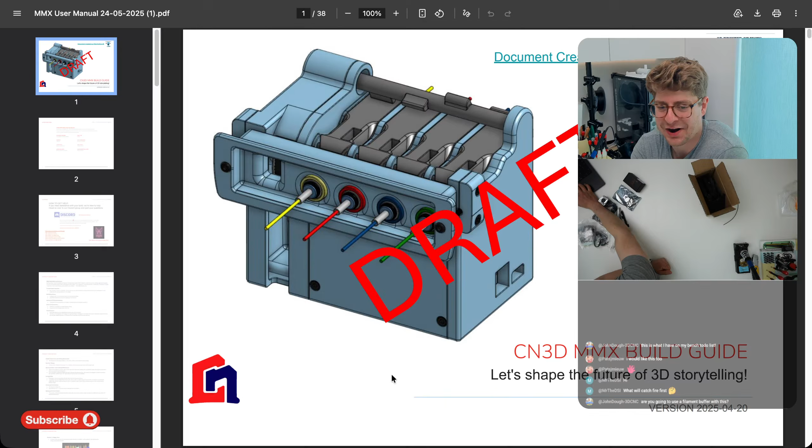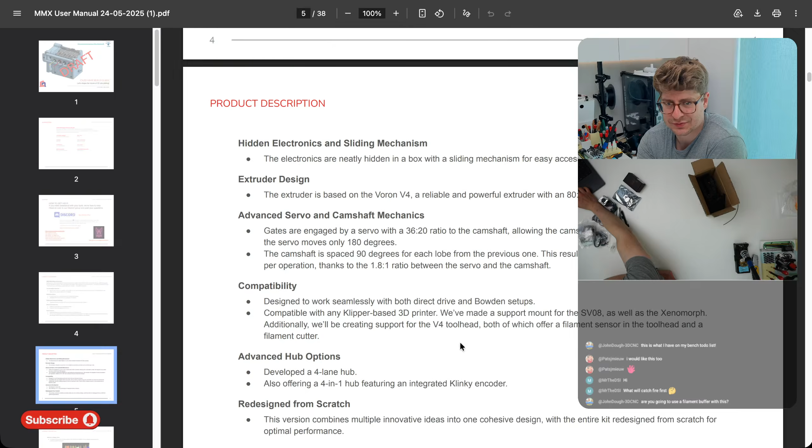Okay, cool. We do have a manual, which has the lovely draft written all over it, and I already noticed it's outdated. It doesn't match the parts I have in a couple of spots. I think there was some revision at some point and this manual was never updated, which is fine. I just want to use it as a rough guide. It's also not really a step-by-step manual, not like your Voron style manual. It's a little bit more high level. So the first part just goes over all sorts of description, which we don't need for now.

The BOM is not correct. Or the BOM is correct, but it doesn't match the steps below. These are all the print parts.

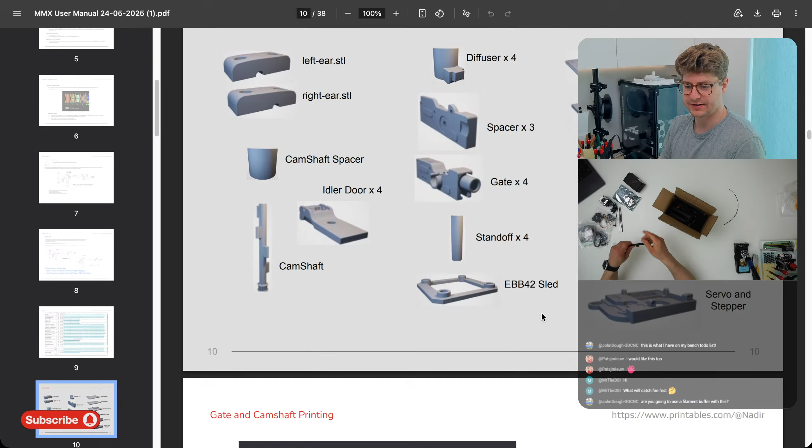So I printed everything, in ABS and PLA. On printables, it said the camshaft and the idler doors. So the camshaft is this one here. This is the camshaft, and the idler doors.

Let me just clump this all out. The idler doors are these, and this is actually the same yellow filament I used on the Switchwire. I had like, I don't know, literally this much left. I printed this and had like a meter of filament left, so it was just enough. It was kind of a one-shot kind of situation.

And the filament was horribly old. I'm not quite sure when I built the Switchwire, but I think it was like 3 years ago or something, and that's how old the filament was. So I dried it a lot, but it was still a little bit brittle. It printed fine though, so no complaints there.

I printed those on the Satsuma, the printer we built last. Oh yeah, and then these are the LED diffusers. These are transparent PETG, 4 of those.

So the printed parts - I hope I didn't miss anything, or that there was anything I should have printed that wasn't clearly described to be printed. Printing was relatively straightforward. You do need supports, like for the camshaft for sure.

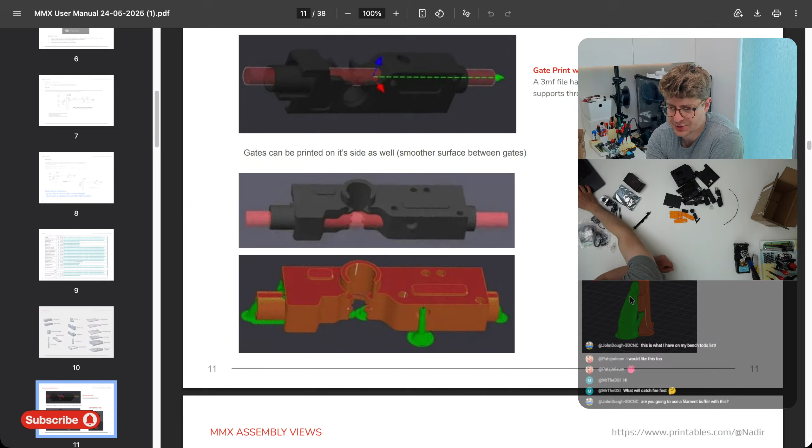I'm not sure if you can see it now, it's behind the chat, but basically the camshaft you print standing up. But also for these, for the gates, you need support. So it's definitely designed with supports needed.

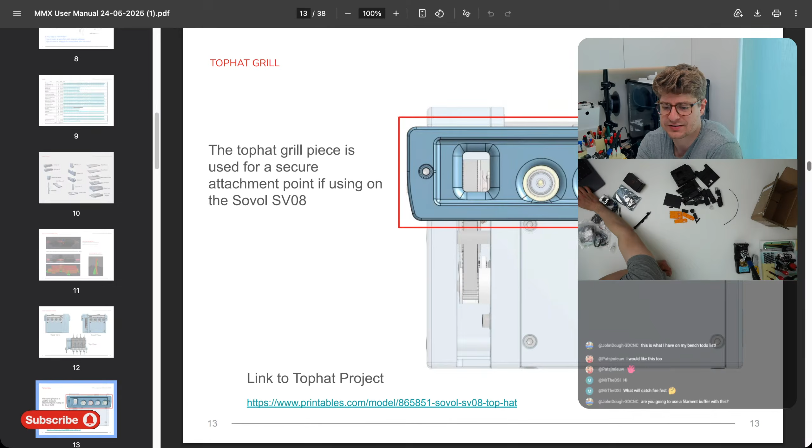And this one, I'm not quite sure, but somehow this is linked to the SV08. I'm not quite sure how, but the official mounting solutions are for the SV08. So we need to come up with something to mount that to the Switchwire later.

That's a little bit the mechanical overview. So basically we have this very big void with the stepper, the servo, the electronics here. And then on the side, we have the mechanics, so to say. The servo is driving the camshaft to select the gate, and the stepper is basically just extruding the filament.

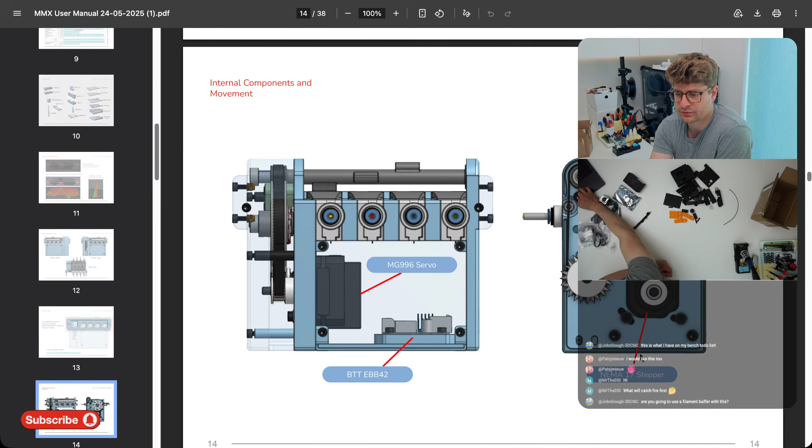That's kind of the side view, so you don't see it again. So you have this big drive gear, which is an 80 tooth gear if I'm not mistaken, which I actually have as a metal gear. So potentially we could also just use the metal gear instead of the printed one. Actually, let's do that maybe - I mean, I literally have the gear, so why not use it?

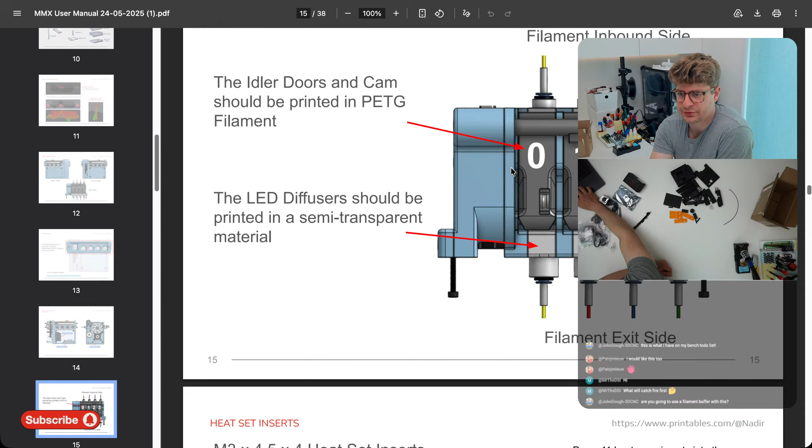Yeah, that's the top view. So we have the gates 0, 1, 2, 3, and I think this is kind of where we need to start off. So these are the heat set inserts, and I think that's a great first step to get started.

And I think these are these two lovely parts here, which are full of heat set inserts. Let me quickly see that I get that right. Oh wait, this is only one part - this is only this part. It's this side and then it's that side.

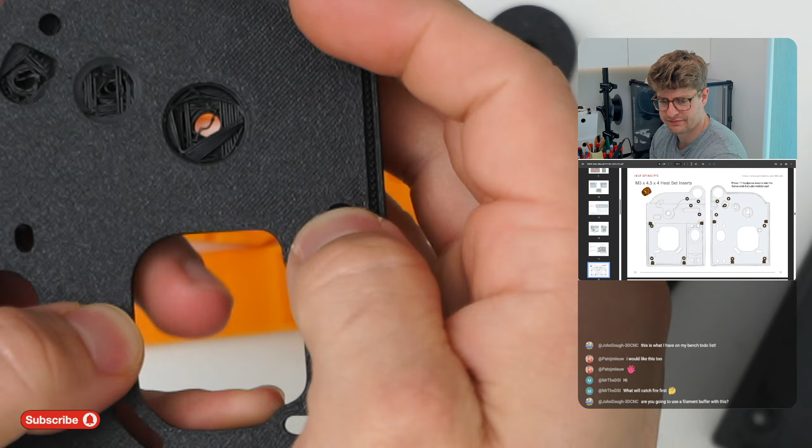Also the holes did not print very cleanly. I mean, it's serviceable, we can clean this up, but the holes - because it was printed basically this way around, the hole overhangs did not print nice. They do use this trick that I also use with the cross bridges, but for some reason this did not turn out so great. But yeah, it will be fine, we will clean this up a little bit.

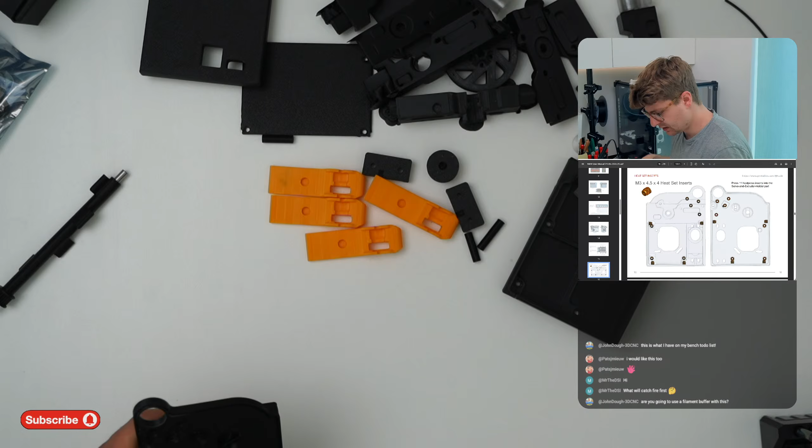But first the insert. So okay, let's start. I see 1, 2, 3, 4, 5, 6, 7. And then on the side we have 1, 2, 3, 4.

Then on the inside, no, that's it. They show the heatset inserts on both views basically. Okay, so it's mostly on this side here.

Let me see. I didn't sort these hardware things because I figured it's not that much hardware this time. So I will just use the bags here, and when we're done, I'll put it in my screw storage.

Okay, and I think the heatset inserts were in this one here. Yeah, I see some more hardware coming out. So we have washers, we have some lovely magnets. We have some M3 nuts, bearings.

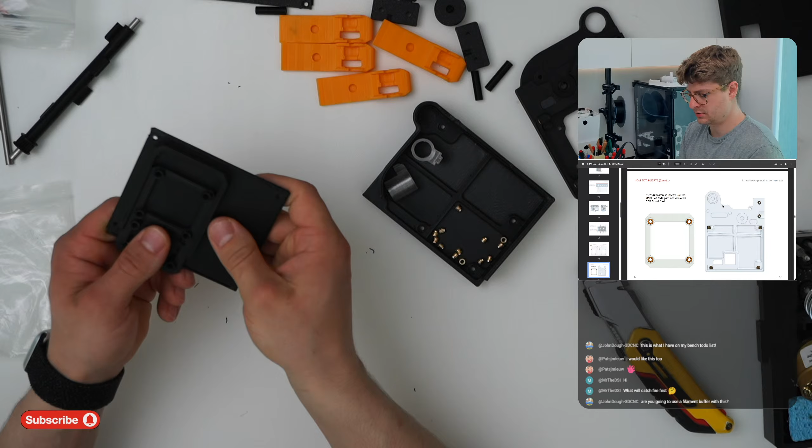So this looks a little bit different from the manual because, as I mentioned, this buck converter was added later, and so the manual is not up to date there.

Okay. And then later sliding in here. And similarly, this screw here.

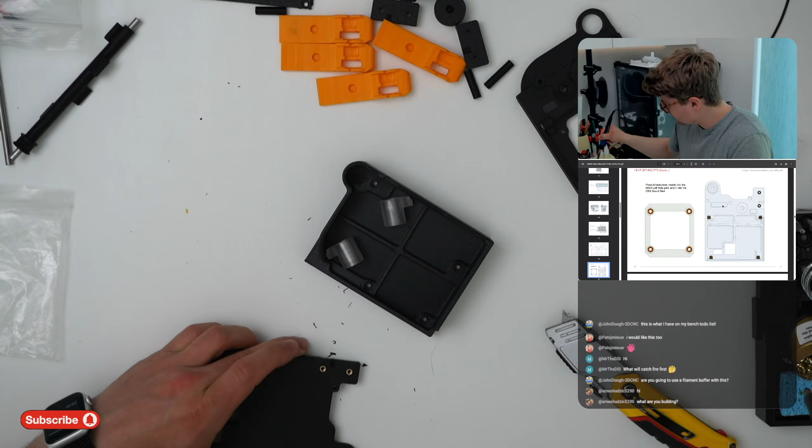No mention. Like this is it. So we do have these 2 short ones here, and there are 2 holes here that do look a lot like they would need a heatset insert. But I will hold out and see if they need to go somewhere else. And then we can later put them in.

Okay. Then they just show us the whole mechanical assembly here. So this is kind of what we have to build. So there are basically 4 pairs of BMG extruder gears in here.

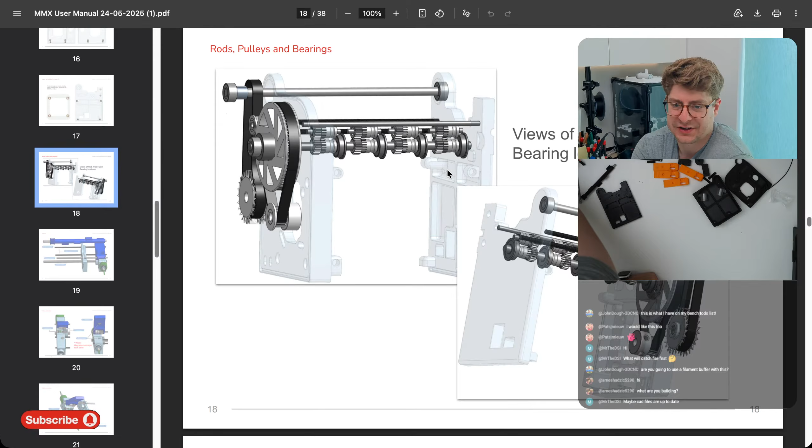Maybe CAD files are up to date. That's actually also a good idea, and I have that, of course, prepared. Oh, it does that again. One second. Sometimes the fusion sharing just freezes. Yeah.

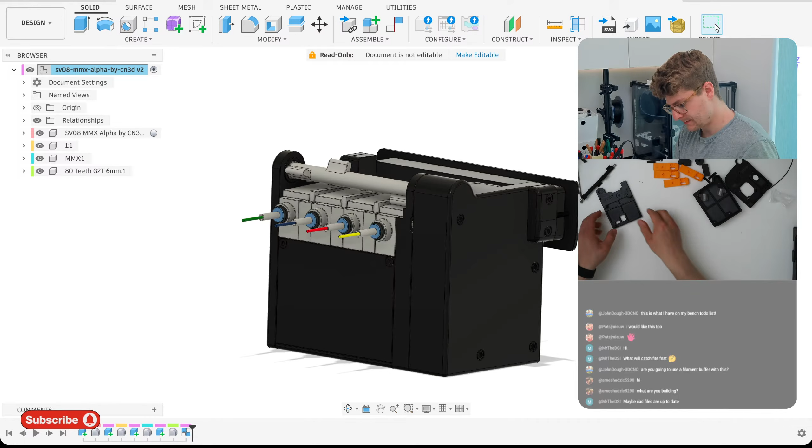No, which part is that? That's the end on the other side. It's this one here. I'm not sure if they model screws here.

I mean, there are definitely 2 heatset inserts in here. Which is body 40. Let me see.

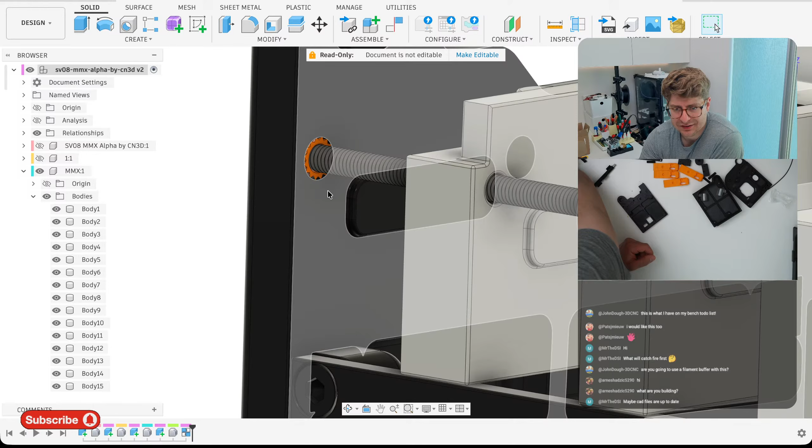Yeah, but it doesn't tell me what this is. And because the body, I cannot isolate it, of course. What did we say? 40 it is.

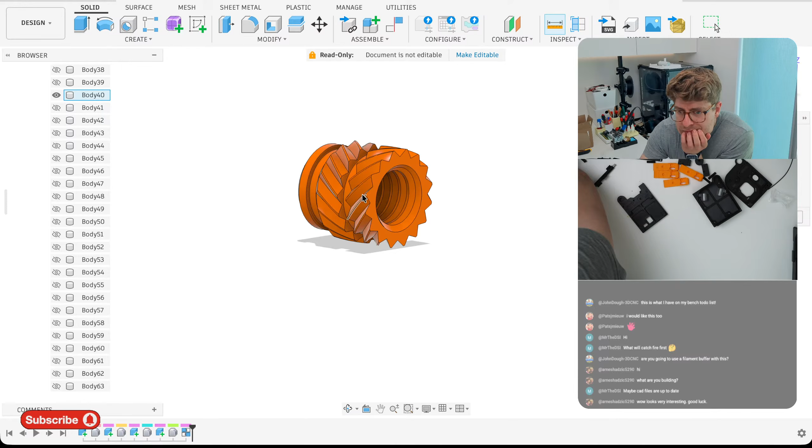0.005 meters. It's very, I think Fusion is a bit drunk. Like, why meters? Can you give this to me? I mean, it's 5 millimeters, but why tell me that in this odd way?

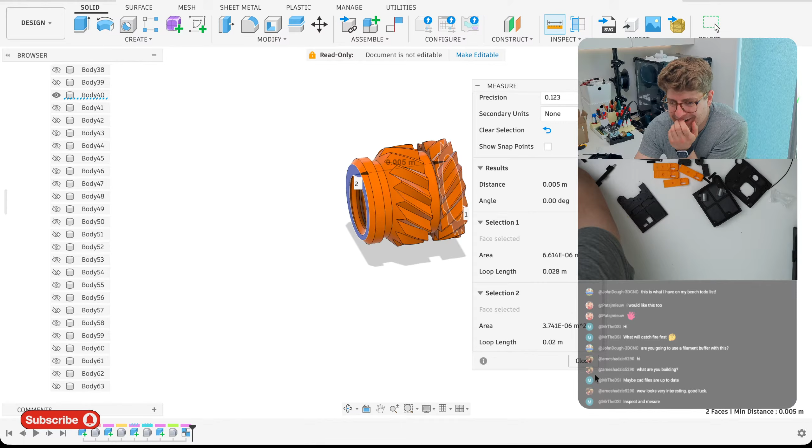That's not helpful. But definitely there needs to be heatset inserts in there. And honestly, the only heatset inserts I have left are these. And I don't think we have, I mean, it can't be anything on the gates because we have 4 gates and 2 heatset inserts.

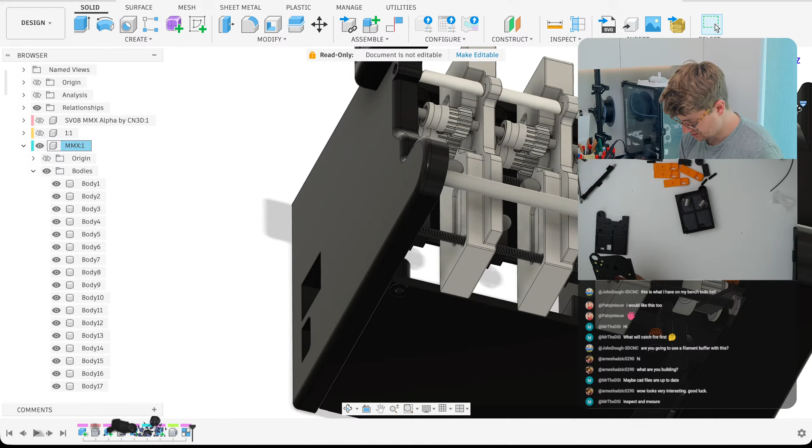So it must be. I don't see any other heatset insert spots. So I think they need to go here. Let's just roll with it.

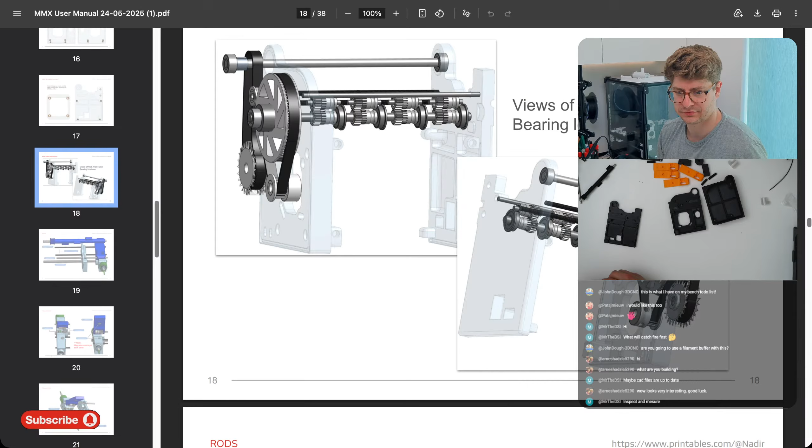Inspect and measure, yeah. But it measures as 5. But I don't see the reason why you would use shorter ones here. But like it's the only spot not mentioned in this document.

Because here it's like they're just empty. They're not like it's in the model. Used. It's weird. Yeah, let's just put them in.

Here you go. Might regret it later. Maybe not.

So when I said the manual is not really step by step, this is what I meant. It's very much just shows you what goes where, but doesn't really give you the order. So heat-set inserts are in. This is the mechanical assembly we want to build.

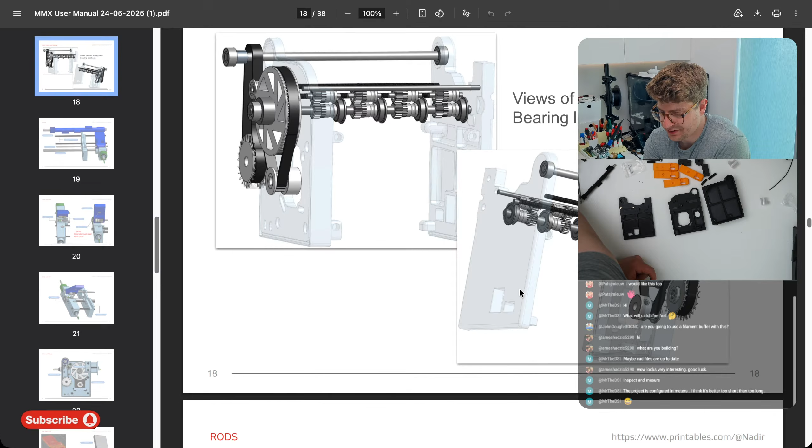The project configuration, I think it's better too short than too long. So this is kind of the mechanical system we want to build, but it's not really clear how to do that step by step.

So I think what we should do is assemble these gates 4 times because we have all the parts now. We can technically put it together. Let's just start with 1 gate and figure it out.

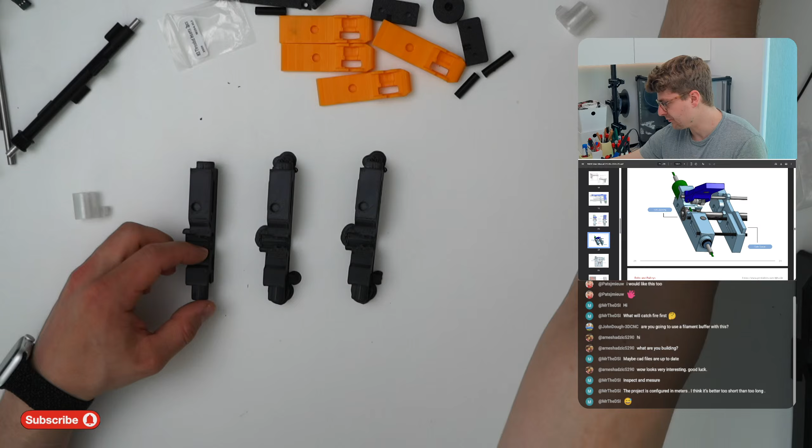So basically how it goes together, we also have to remove some support still here, I didn't do it yet. So we have 4 gates, and in between the gates we have these spacers. They basically go in like this - 3 spacers, 4 gates, and then you kind of smash it together.

And then this kind of is how it fits together. Looking at that now, oh, in the CAD it's the other way, or this image is the other way around. It's like this. Okay, well, either way.

So we have basically 1 bearing here on the side. We have the ECAS on each side - we can add them at the end. And then we have the extruder gears. So let's just put that together.

So we have this M5 shaft that basically goes through all of them. I believe these are the bearings that go in here. They do fit, so let's assume that's the case.

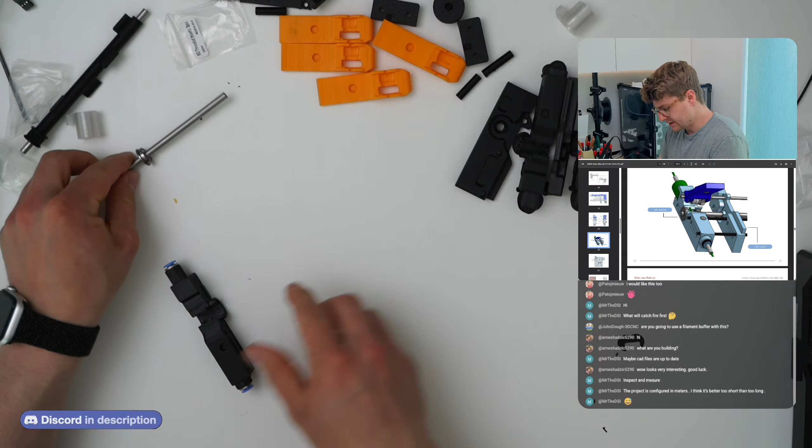Okay, you know what? Let's just do that for all four first. As I mentioned, I have a little bit of support still here - they just came hot off the printer basically.

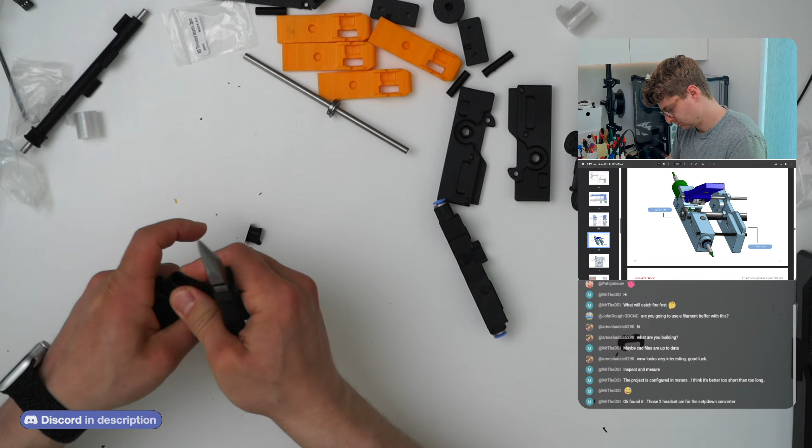And what I already know from the support here, the diffuser doesn't fit super well. So what I did with the other one is just basically cut off the bottom two layers of this interface here, and then this goes on still quite stiff, but a lot better.

Then let's ECAS this one. By the way, what I already figured out is they're quite weak in the middle here, like the parts. So if you press the ECAS fittings in, I think you should pay attention where you push.

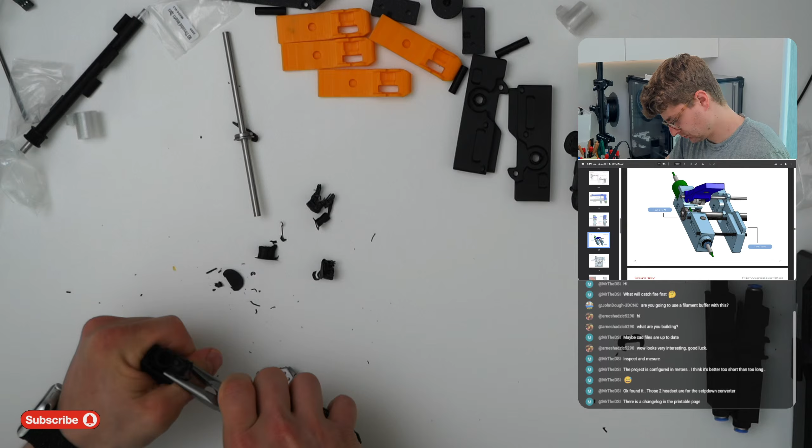Okay, that's two. That comes off a lot better.

That's number three. I think that's just what makes these MMU builds so time consuming - you have to do everything like X times. The support doesn't come out super nice.

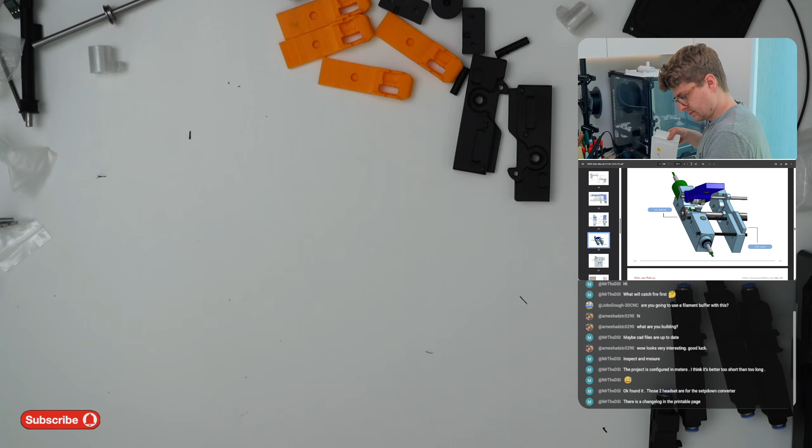Okay. Then let me quickly clean up a little bit. Let me quickly put all these clips in the back.

Okay, done. So we put the bearing, and I have that on the right side. Yes, this is the bearing. So let's just put the bearing in all of these.

This one still has some mouse ears. Okay, I have one extra bearing - I assume that goes in the end piece. So what we need to do now basically, we have the BMG extruder hardware here.

Sorry, start throwing out empty bags. 1, 2, 3, 4. And I will not screw them in yet.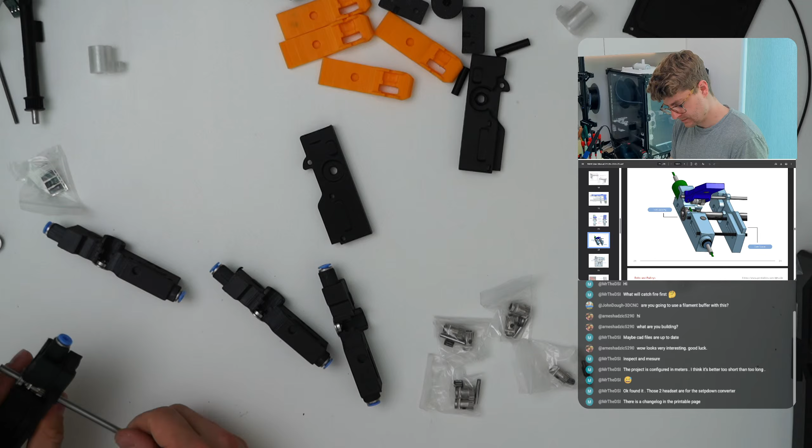Just make sure this runs smoothly. Like from the print, the top is a little bit flat here. Once it's in, it runs fine, but let me just quickly make sure that these are proper 5.

Okay, then the next one. Then the next extruder part. Maybe actually before we put them in, let's add a little bit of thread locker. And make sure we put the right one in, because this one is without screws - one of the gears has no screws and one gear has screws, and we of course want the one with screws. The thread locker takes a while to set, so it's okay if we screw it in later. Put the other ones out, and I'm also making sure I take the correct ones.

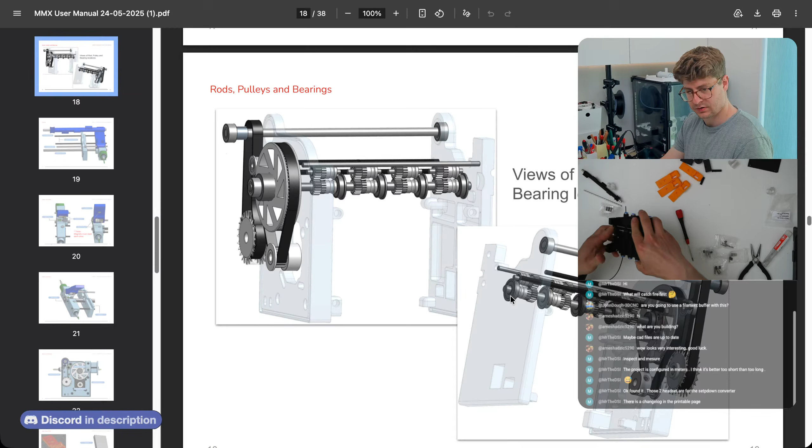I think technically we can already align them. So I just have a bit of filament here, and the only thing I want to make sure is that it's in the middle. But I'm not quite sure - let's go check this overview. So it's not supposed to stick out a lot on this side, because I think this will just go in here basically. Oh no, the second one actually goes through here. No, that makes more sense, and then this goes here. So basically we shouldn't have a lot of the rods standing out on this side here.

Okay, so this looks okay. Also looks okay.

Then let's do the following. Let's put the M3 rods here in this end piece. I don't think we need threadlock for this.

Hi there, hi there, Ravenkeeper.

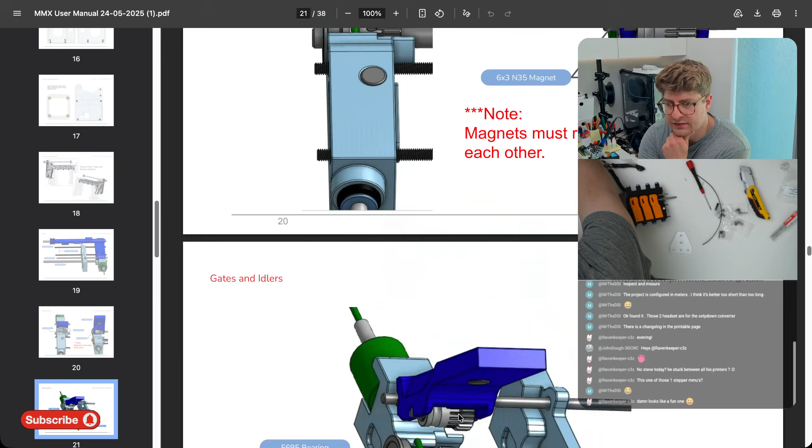I actually had to, when I initially put the PTFE tube into these parts, it was relatively hard to push the PTFE tube, and the manual says explicitly at some point we'll talk about these gates. Yeah, so they say use a round file to clean the tunnel so that 4mm OD PTFE slides in easily. I just used a 4mm drill and drilled it out a little bit until the PTFE slipped in easily, because now you see there's very little friction here on these gates. So I think this is pretty good. Before it was just very hard because the PTFE was a bit pinched together.

Looks like a fun one, yeah. I think it's a cool little project because it's not too complicated and you don't have a massive expensive BOM.

Okay, well I think all these parts are done. The only thing that smart people would have done is the end stop switches in here. We completely skipped that. I knew I would forget something. So yeah, we have to take this apart again. No biggie.

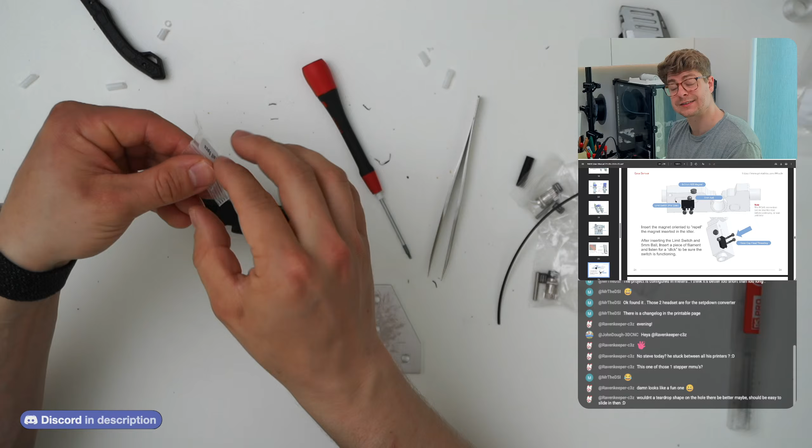Looking at the manual here, so I do have these 5mm glass balls, and they were nice enough to give you one spare, so I can lose one of these.

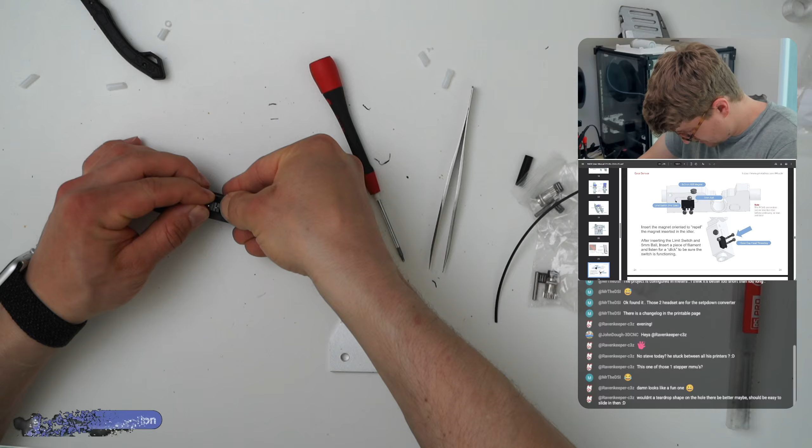And we have the end stop switch. So let me just try to push this one in. Which is a very tight fit.

Now the art will be to push them far enough in. I need to push a little bit deeper. I still see the writing in the holes here. But I shouldn't push too deep. I do already hear it click. If I insert that, I do hear it click.

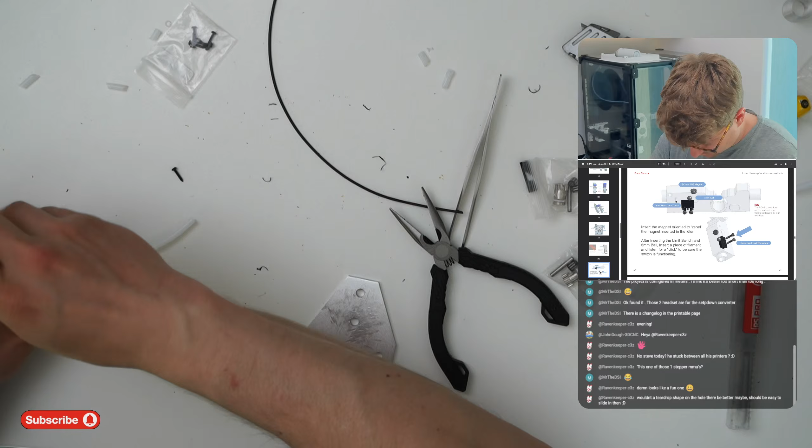I think we can. There will be other Bowden tubes in here for sure later, but for now, let's just keep this like a stub here. Yeah, perfect. This goes very easy.

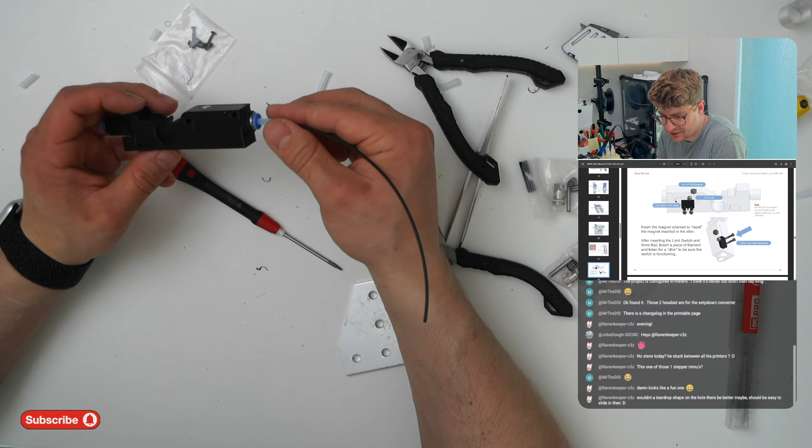With the teardrop shape on the hole there, it might be better, should be easy to slide in then. Yeah, there are no teardrop shapes on any of these holes, and also the supports are not that good. So yeah, I feel like you could optimize these parts a little bit more if you want to. But I mean, if they're functional, they're functional. I'm not complaining. Okay, this is number one.

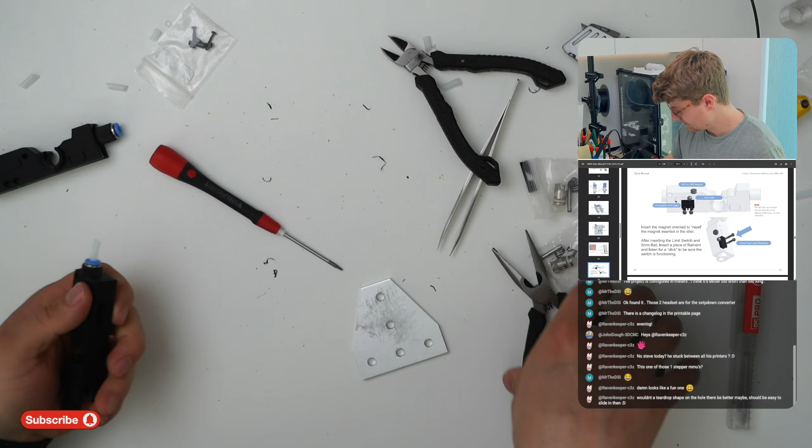Let's hope the others are quicker. Where are my fun little glass balls.

You also have to pay attention to put the switch in the right orientation. It needs to align with the wall basically. I think I landed that one quite good.

Yeah, the screws kind of pull it in the right depth. That's quite good, like you don't have to nail that. The screws kind of, if the hole is visible at the end, the screws will pull it in. Okay, two.

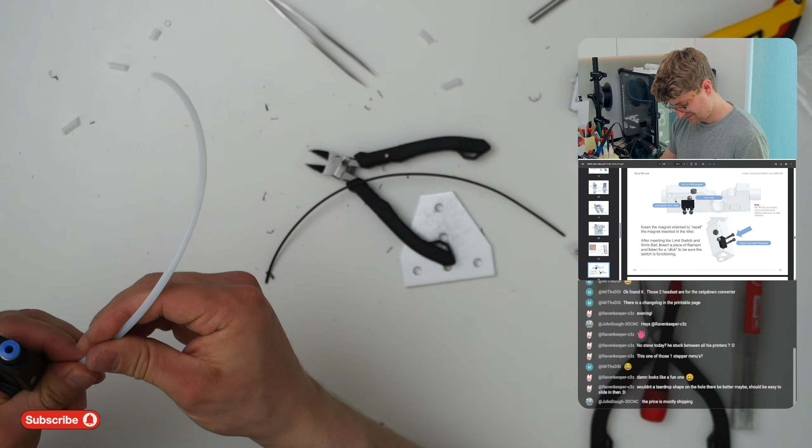I mean, like they don't have to put in like a second step or something, right? But like screws, magnets, like I mean that doesn't cost anything.

And I think you have a lot easier time to push it in there if you have an angle at the filament. Yeah.

I don't hear the switch clicking all the time, but it must be clicking, so yeah. Let's see, we'll figure it out later when the switch is hooked up.

Okay. Second time's the charm, right? So then I need number 3.

Nope, I forgot the bearing. Mea culpa. Let's try this again.

We have the last spacer. Oh, we need number 1.

Then the last spacer. Then this one has the bearing installed. And number 0. Okay.

Now we have it installed with the switches. That was quite a detour. The Klipper macro for this one must have been really fun to make.

Well, there's the Happy Hare, which is like, I don't know how to call it, the driver for the MMU units, and this one is supported by Happy Hare. So that should cover most of it. Let's clean these out here.

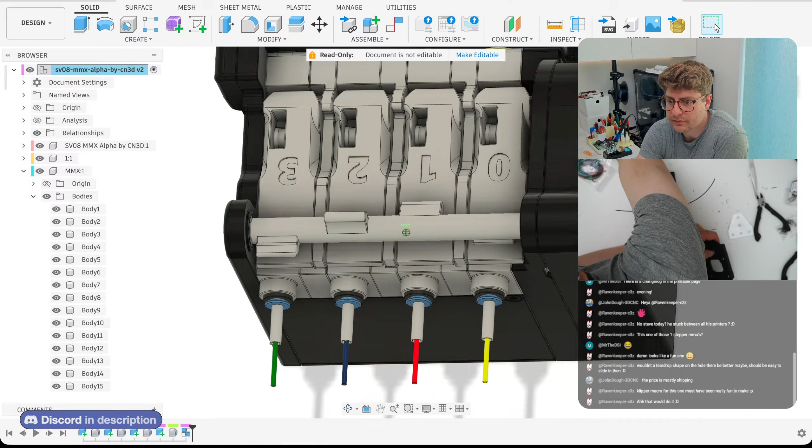I think this is where our last bearing goes. Pretty sure. Let me quickly take a look at Fusion. So this is the mechanical thing we need to make. Yeah, there's the bearing.

Let's see. Mine does not fit like this because there's a lot of filament that's not quite where it's supposed to be, so I have to work a little bit on that. I'm not sure if it's my fault or if the model is not good there, but the overhangs are not very nice. Yeah, that should fit. Okay.

I really have to squeeze it a little bit together to get to the M3 thread here. Especially this one is barely coming out. That will be interesting in a second.

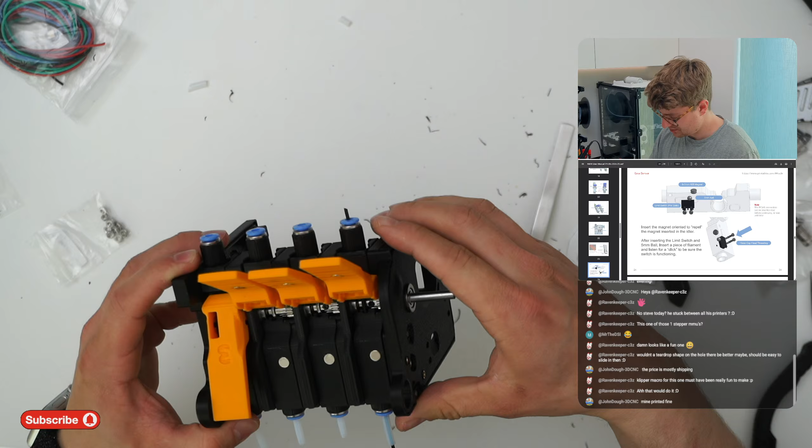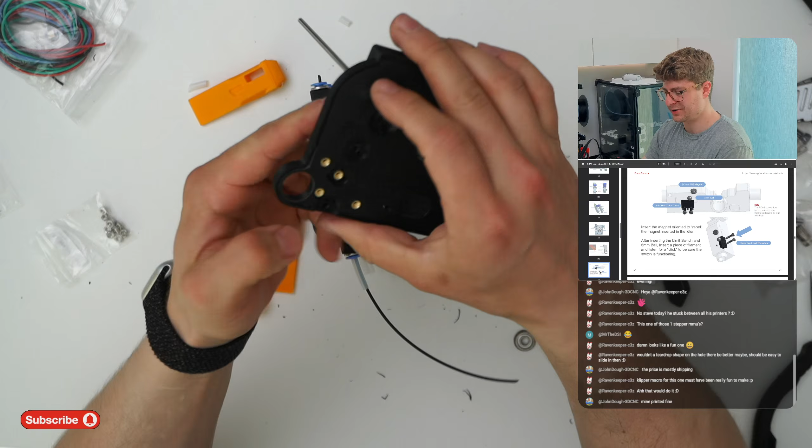Okay, let me quickly take this out again. So basically what happened here shows me this one pushed basically all the way through here, so it was definitely not far enough in on the other side.

That is not how it's designed, but I think we should not have a problem from that. What I will do is loosen these M3 rods a little bit here so we can have them a little bit more out, because at the moment I thread them in all the way on the end, and I think that does not work.

Okay, let's insert these again, and then we have to push the rod in. It would have been nice if this would have been a through hole here. It will be a little bit of like a... I love magnets.

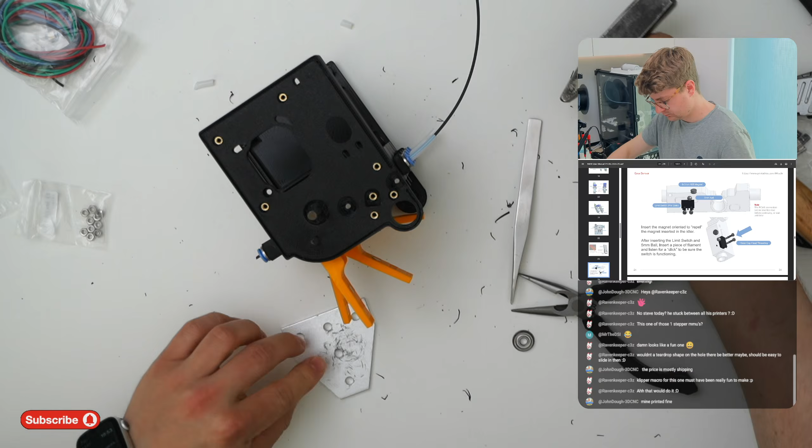Okay, I will still use the hammer here to tap this in. No, now it's a through hole. It's not quite as designed. Let me quickly...

So I'm just using the screw basically to align it with the rod, and now it's definitely in on the other side. And now it would also be okay here, so I'm not quite sure. You have to put this in relatively deep on the other side, otherwise it pokes through on this side. It's more like a cosmetic issue than anything else, but

it does annoy me. You know what? I will keep that for a second and later just super glue that on there. It does annoy me.

And it's pretty hard to turn the shaft now. So I feel like there's a bit of a bend at the moment. I think once we tighten these M3 things here, maybe it's better.

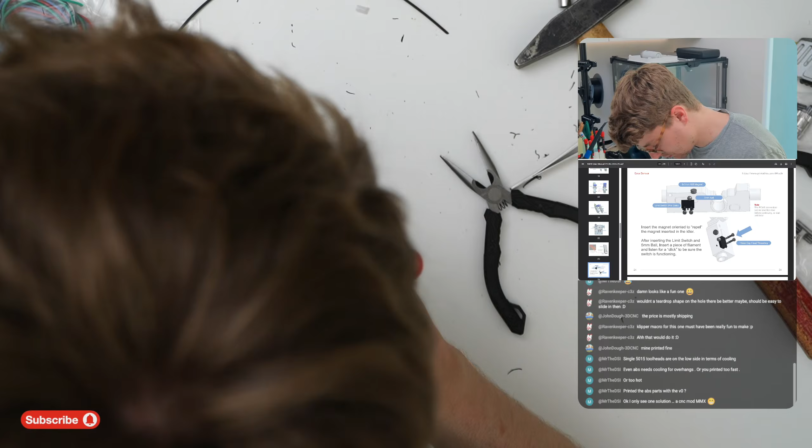This screw doesn't want to go in for some reason. The heat set insert is a little bit misaligned. Not sure if I screwed up there when I put in the heat set insert.

Yeah, but now it's hard again here to turn this. It will work, but it's just a lot of friction. I'm not quite sure where the friction comes from.

Hi Daniel, welcome. For which printer? For the Switchwire. That's also why we have the yellow.

Hmm, okay, so I'm not sure what to make of this, to be honest.

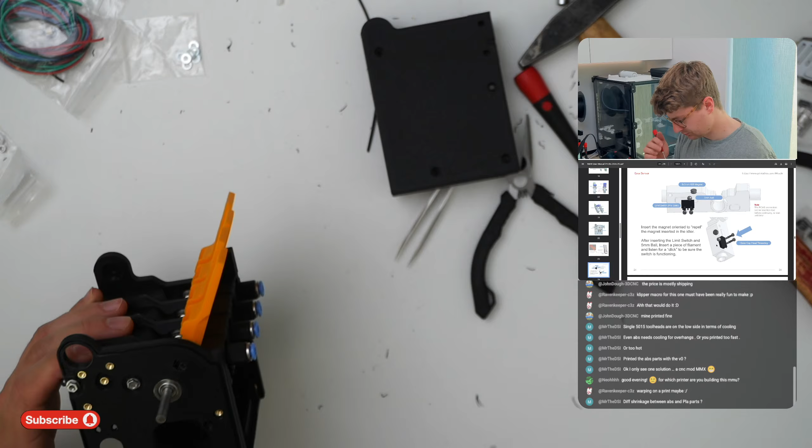You know what? I will reprint this part just for visual reasons. I will continue now the build, but I will replace it. Shrinkage between ABS and PLA parts.

The only PLA parts are these 4 here, and they are for sure not a problem because they're not connected to the shaft here and they have plenty of play.

I will replace this part. The other one is straight for sure. And it also makes sense that it goes a little bit like this because these two rods are all on the top part, so it's normal that it flares out a little bit.

Yeah, this is easy-ish to replace later. So I will reprint this and replace it. I'm not sure if this will solve the issue.

Because if this part would be the issue, then if I remove this bearing here, it should move freely, but that's not the case.

Well, worst case, it wears in. I mean, it's kind of moving okay-ish now.

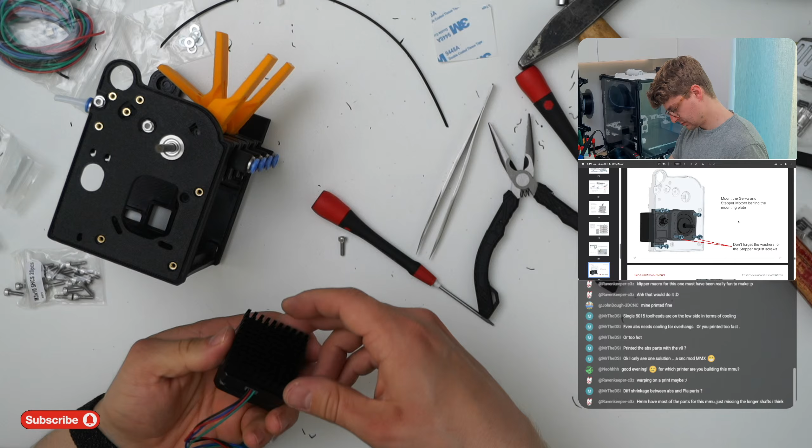Before I put this in, let's also apply the heatsink on the back. And we will have a little bit of fun with cabling, but we'll be fine.

No, M3x10 is too long. Then let me do M3x6 here.

That seems good. Maybe you get away with M3x10, M3x6, M3x8. Let me actually quickly try M3x8 if that's right. Oh, for these we definitely need the M3x10s, because here you have a hole where it sinks in, and these are on top.

So let me grab, where did I put them? M3x10, and we also need a washer for those. Two washers. I think they give you quite a lot of extra screws on these general sizes, so I don't see us using this many screws.

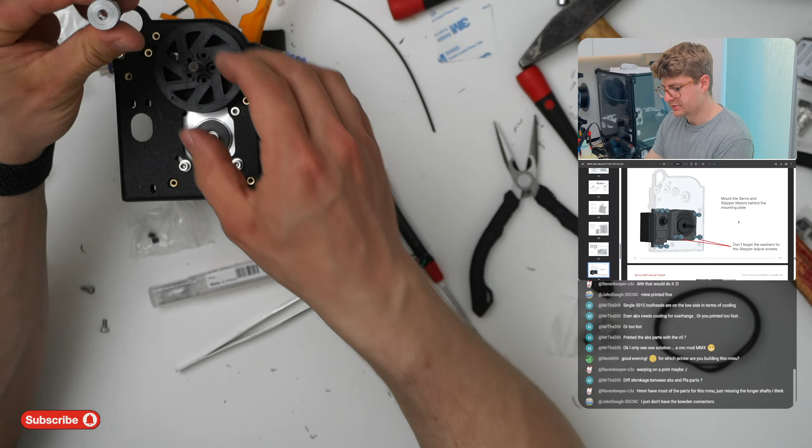So it basically goes in this way, but we have to remove this top, I'm not sure how to call it. Use different pliers. Here we go. So this top ring basically comes off, and we will not need it anymore.

And then this goes in here. We also need to use the hammer just to tap it in. And then basically this is now connected. We have 1, 2, 3, 4, 5 button head screws, I think.

I wonder if they want us to use these M3x8 self-tapping screws here. Let me give that a shot, because that just looks about right. Yep, I think that's where the self-tapping screws go, because you're kind of threading into the teeth of the idler.

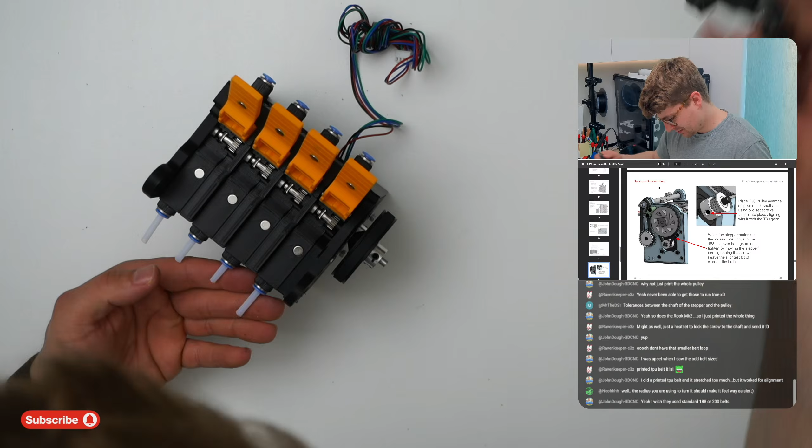Just for my visual, we'll replace these later with some properly cut ones, just putting them roughly to the correct length.

Okay, then the servo. So this goes in here, and you can kind of adjust it up and down a little bit to tension the belt.

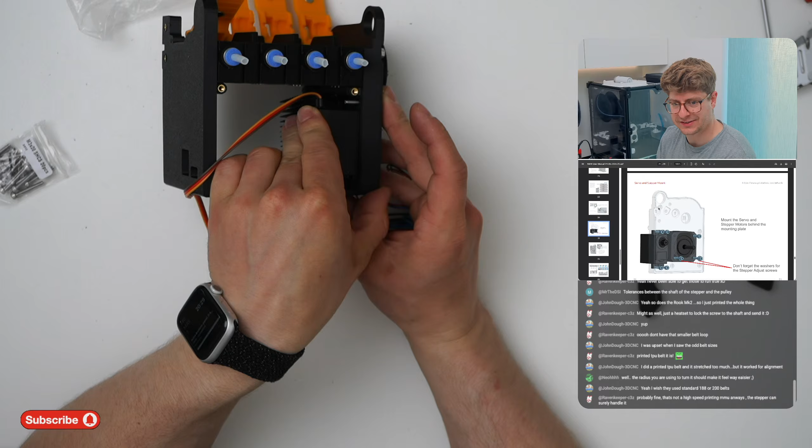But how is this fixed in place? Because this does not mount M3 screws. We can put a washer and nut behind that. Is that the intention? And it's not modeled. Okay, then washer and nut it is, because I don't think there's another way.

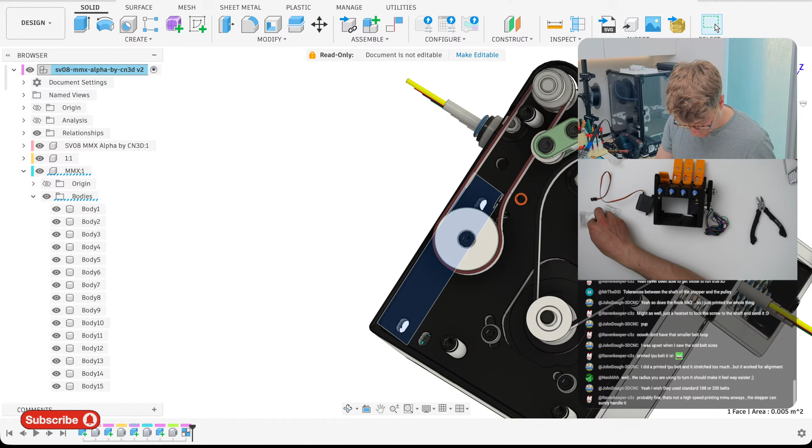And I will use a little bit longer screws here on purpose, since they gave tons of long screws, so I'm just gonna use... I even forgot what I have now. M3x20.

Let me get the top one in place. This would have been easier to do before assembling that. So maybe mounting the motor to these plates before is a smart move.

I'm also wondering, initially my plan was to just solder to these connectors, but if we now put the motor, we definitely need to do the connection points here before. There are these connection points in here for the wiring for the end stops, so I think we need to do those first before putting in the servo, because that will cover that.

Wasn't there a trick with JST connectors? I vaguely recall that you can use 5-pin. Oh no, just not wide enough. Because the hole spacing of the JST connectors is the same, so... I mean, it does fit. It's a friction fit, but it does fit.

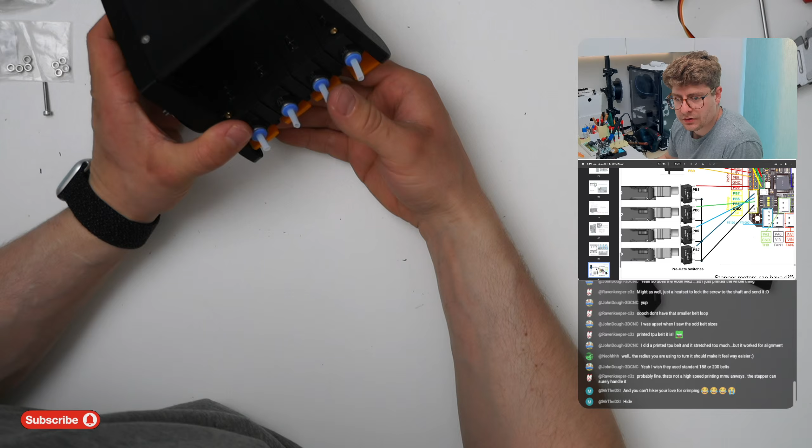Let me quickly check out the wiring. There's the wiring diagram. Okay, so we are connecting... Now I need to remember which orientation I put the switches in.

And I bent one pin. Yeah, fix it. Which orientation did I put the switches in? Let me see, the balls... where was that? Where's it described? Here. So the ball is on the inside, and that's also where the switch then is. So the switch is on the inside, and the inside is ground.

So basically what I need to do is connect... I'm not sure how to show you that actually. Classic me, I should have done it earlier. But there's basically, you know, the pins, so we need to connect all of these basically with ground.

They give us some silicone wiring, so I will just use the black wire for that. I think the easiest is to keep the wire in one piece. So at the end, we can of course remove a bit of wire, and then we kind of space it.

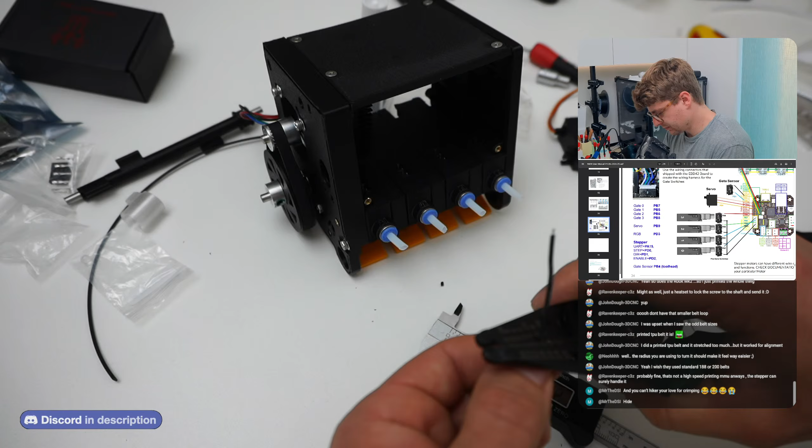And then we can solder this exposed little wire section. You just have to kind of move that all a bit over. And now we can solder these gaps basically to the plugs. And then I think I will start on this side.

So this will be a bit iffy with soldering, but hey, we're here for a challenge, right? And then I'll just leave some generous amount of cable, and we can add some crimp to that at the end.

Yeah, the order of operations I'm doing here is definitely not ideal, I think. But it's also like if you solder these, you kind of connect these gates to each other, which is also not ideal when you put it together.

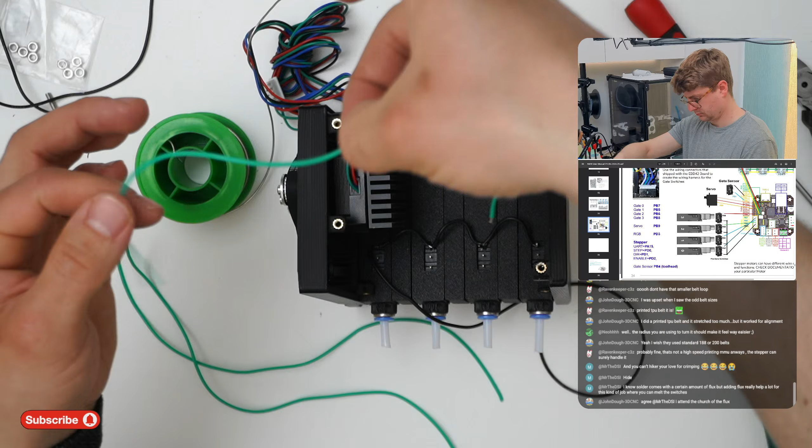Wait, I think I have matching cable. One second. We will solve that. Yes, I mean, lucky me. Most likely comes from the same factory in China anyways.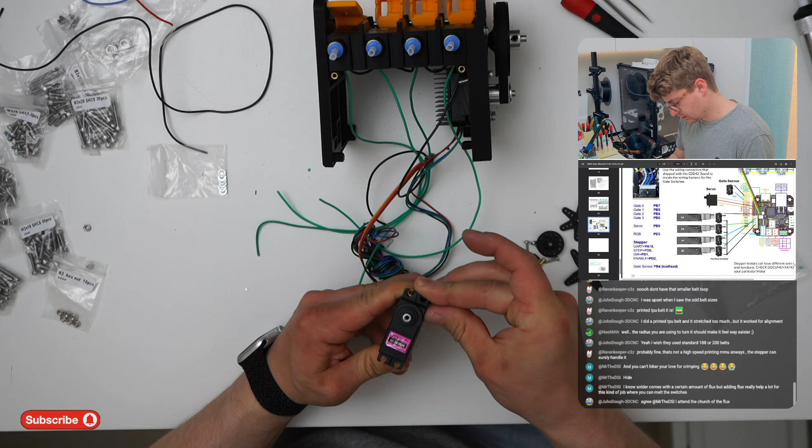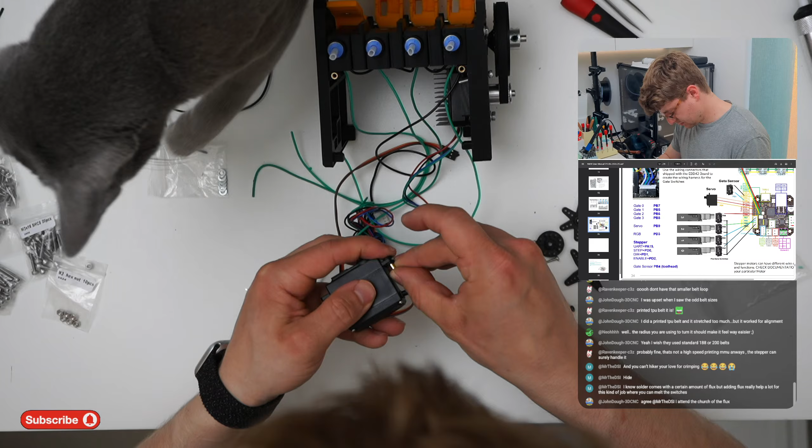Oh wait. Wait. The goodie bag of the servo comes with these, and I think this is kind of how you want to put it together. There's a rubber ring. Hey Loki. Aha, and then from the front you have these self-tapping screws that go in here. Okay, so there's this rubber thing.

Oh, minus one screw. That one is unrecoverable.

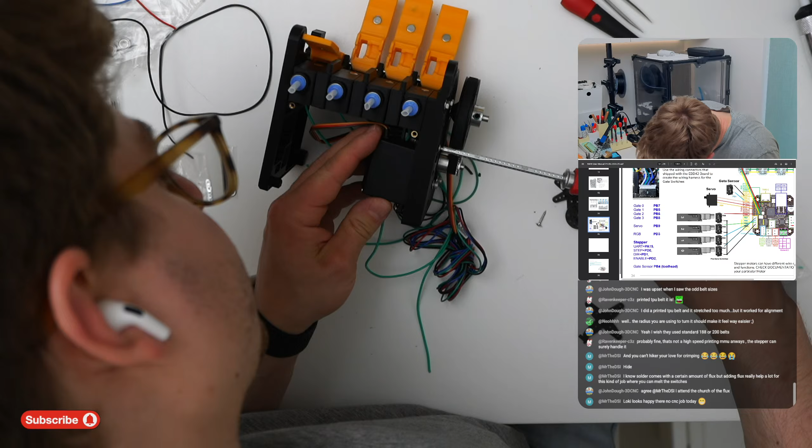No, that's not the screw for that. That's for the... If this goes clean through, how is it supposed to be mounted? That's a good question.

Loki looks happy, no CNC today. Yeah, the last days, or like last streams, I mostly had him parked at my neighbor, but it only went good for like a couple of times, and then he got always super bored.

Attend the Church of the Flux. Yes, comes with a certain amount of flux. Adding flux. Yeah, I know. I also have flux.

I'm really not sure how am I supposed to mount that, because these screws are not good for that. Like they go... and they for sure thought of something here. Well, I'm not sure, but I will stick with my approach. But I do use these rubber things. So I also see there's a hole missing.

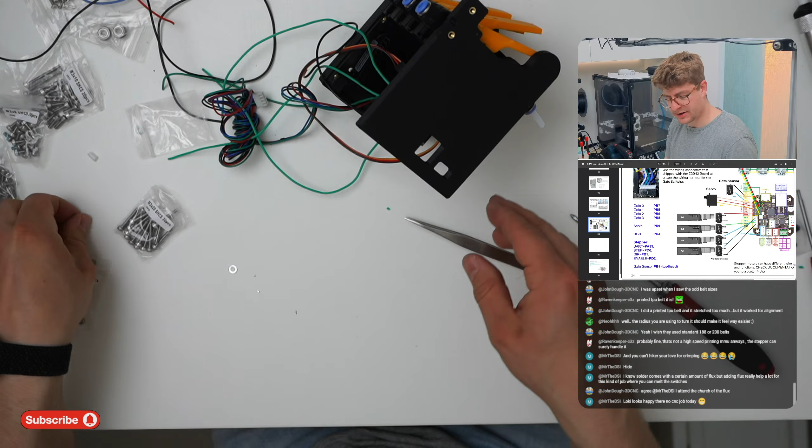Okay, so 4 washers applied, two nuts. The last one is really tricky to get to, but we managed. So we can still move this up and down a bit.

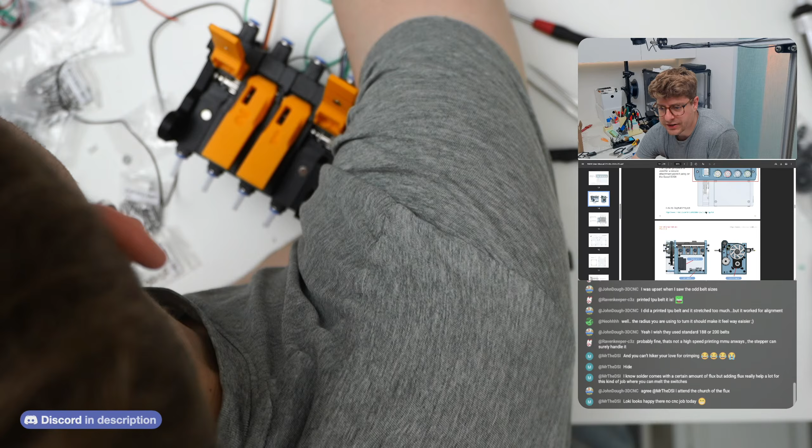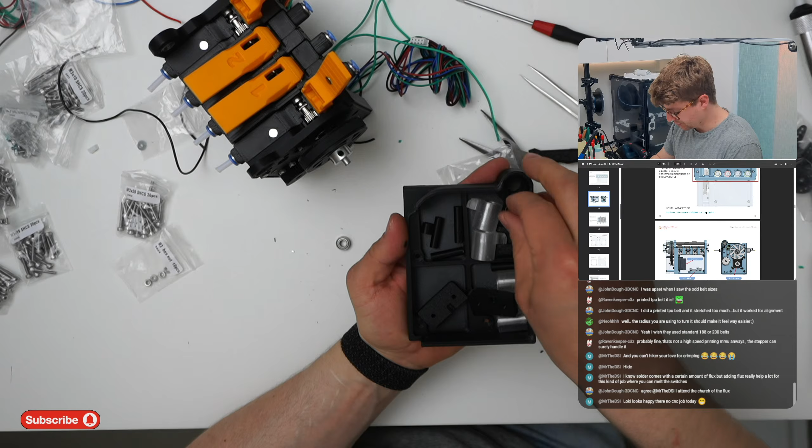Where do they explain the camshaft? They don't really explain the camshaft bearings, to be honest. I think these two, they're also too small. I think these are for the tensioner here. They're for this tensioner. And I think these, exactly, this goes here. And I'm pretty sure there's also one in this cover piece that we put on later, one here at the end.

Which doesn't want to go in. I can't really push it in with all the parts in here.

The third one, I'm not sure where this is supposed to go because this is too wide. And I saw the installation video. I'm also not quite sure where this small part goes. So this goes in here.

We need to be careful with the position. And we also still have to add the counterparts for the extruder gears here. But if we put this in here, so basically we can activate it. It's a bit weird that it doesn't go into the bearing here.

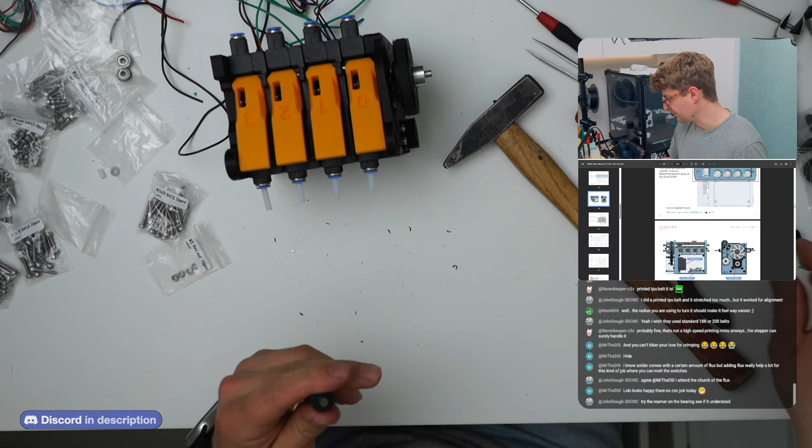Not a printed part, it doesn't fit. It just doesn't go in. That is weird, so there might be some issue here with the bearing or the shaft, one of the two. I remember I also had a very hard time inserting that here.

But according to my calipers, the shaft is just under 5. Okay, well, that is something I need to figure out, because if that doesn't fit... I mean, now this one fits a little bit, but then it also doesn't come off anymore. Not quite sure what to do with this.

Okay, cool. Well, then for me to do is reprint this part. You see here, basically the corner is kind of warped in. So I will reprint this part and we'll take this off and reassemble that.

Yeah, and then next time we continue basically with the BMG gears here, and then with the camshaft, hopefully with fitting bearings. Try the reamer on the bearing, it's actually an excellent idea.

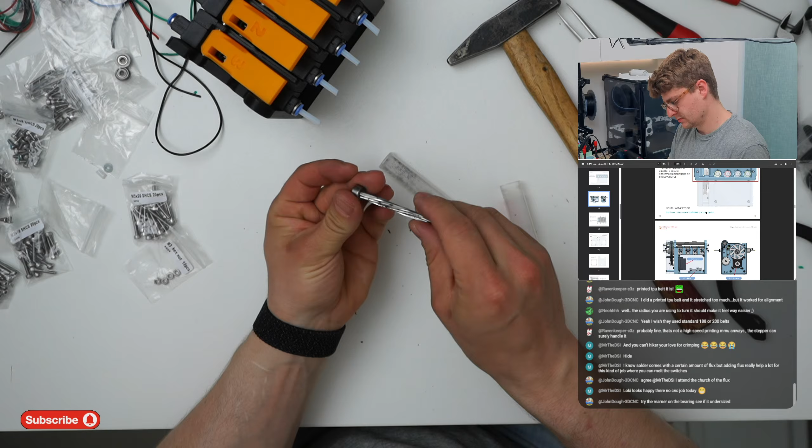I think it is, because this is how far it goes in, and the reamer is undersized on the tip, so the bearing is too small. That is an interesting problem to have. We can think about how to mitigate that.

I will think about that. I don't have any other bearing at the moment, but yeah, cool. I count it as a success. We're not done yet, but we will get there.